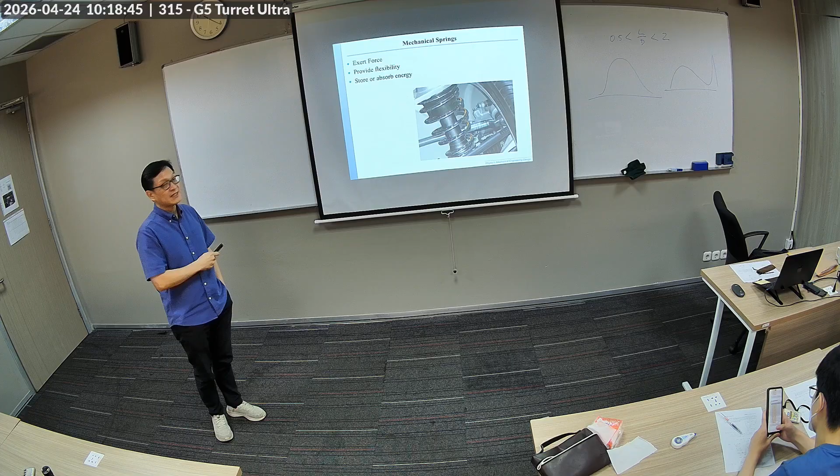You want to exert force - you want some compliance, and other times you store energy. You see it in your cars for the suspension. So you provide some flexibility, you store or absorb energy.

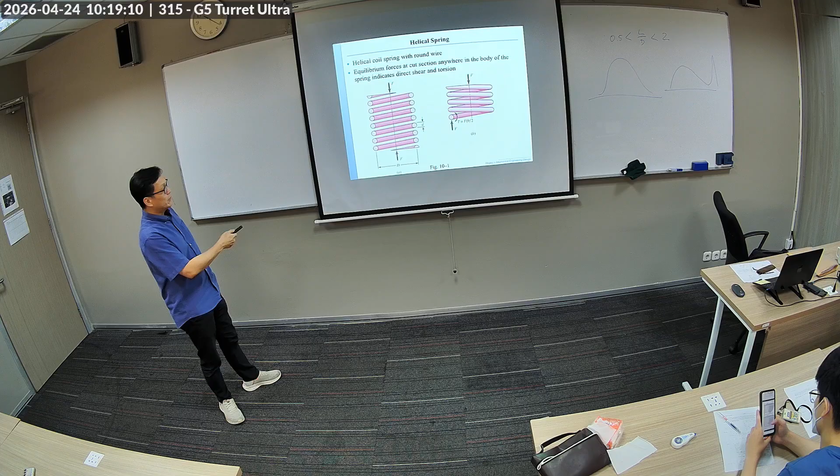If you look at a helical spring, it's basically a wire being wound. It's wound and then it creates that shape, so you have the compliance or flexibility. You press with the force, it deflects, but then it returns to its original shape.

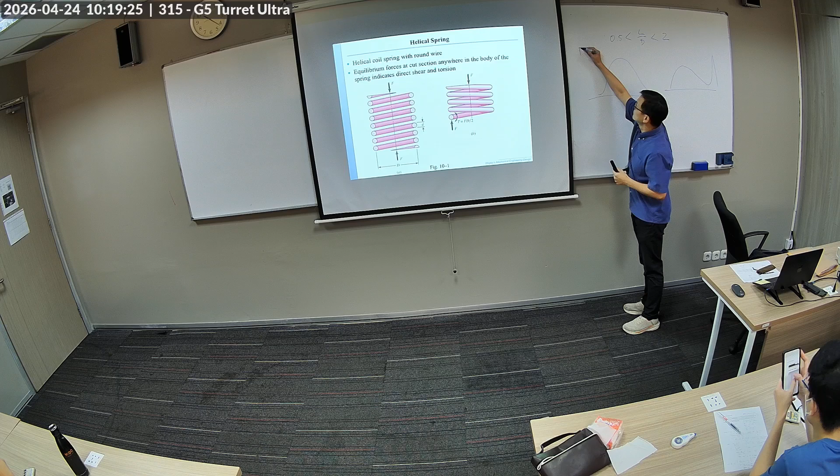The basic spring force calculation: the force of the spring is equal to K times delta x, the deflection times the K.

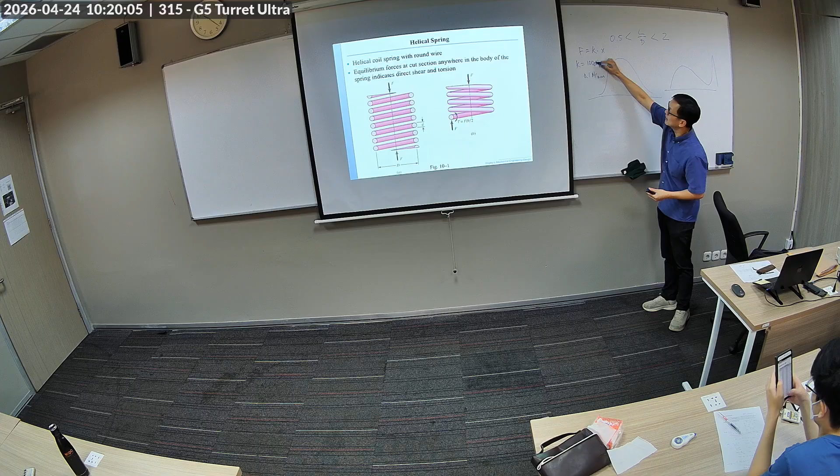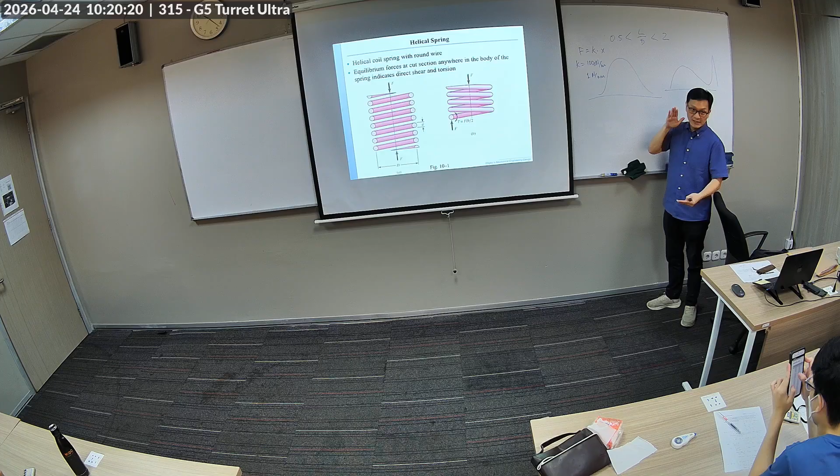If you see a K of say 100 Newton per meter, that means you need 100 Newton to deflect it 1 meter. Well, of course, you don't deflect springs 1 meter. In essence, this is like 0.1 Newton per millimeter. That's tiny, I guess. So 1,000 Newton per meter is 1 Newton per millimeter. You press 1 Newton, it goes in 1 millimeter. You press 10 Newton, it goes in 1 centimeter. So it's very straightforward, very linear, very simple.

You have different types of springs. This is the typical one you associate with springs - it's a linear compression spring. But there is also an extension spring - you pull out and it returns to the original length, which is compressed.

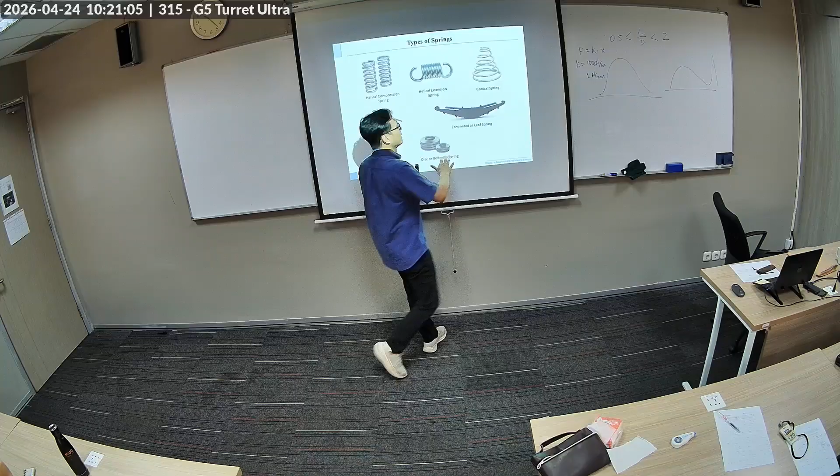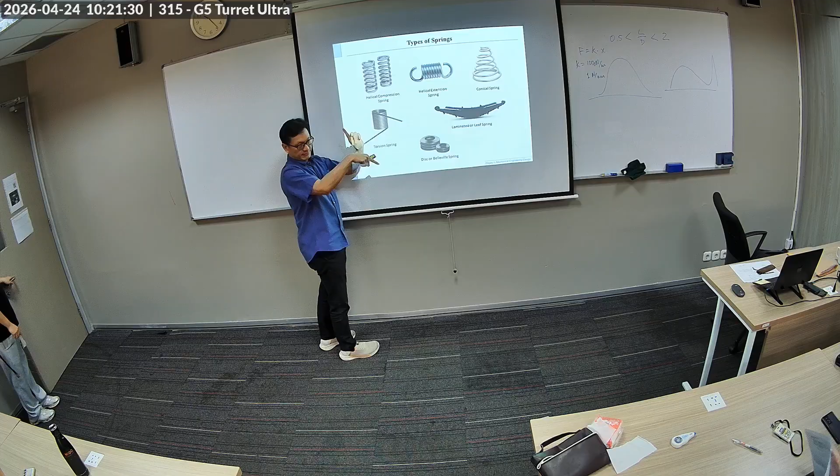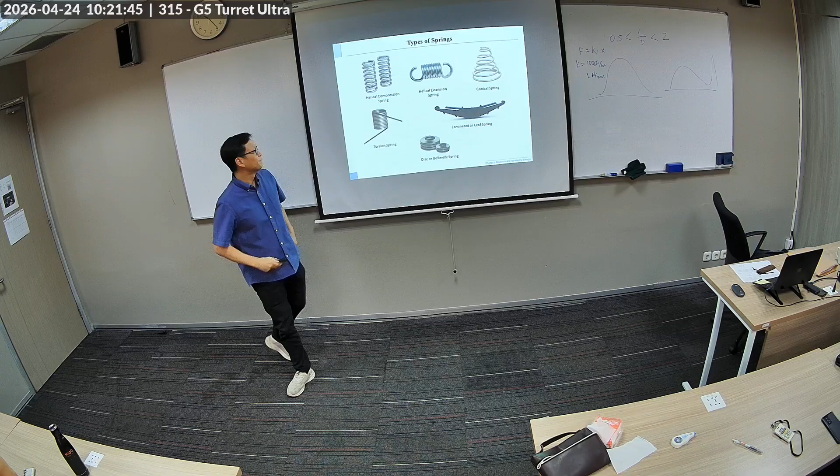Torsion spring - you basically do the angular motion, right? This is an angular spring. When you see this, you girls - your hair clips - it opens in an angular way. Okay, that's your torsional spring.

This is what you see in pickup trucks, maybe heavy load vehicles - it's a leaf spring. You hold this here, and this is where the force is. It's going to deflect this way.

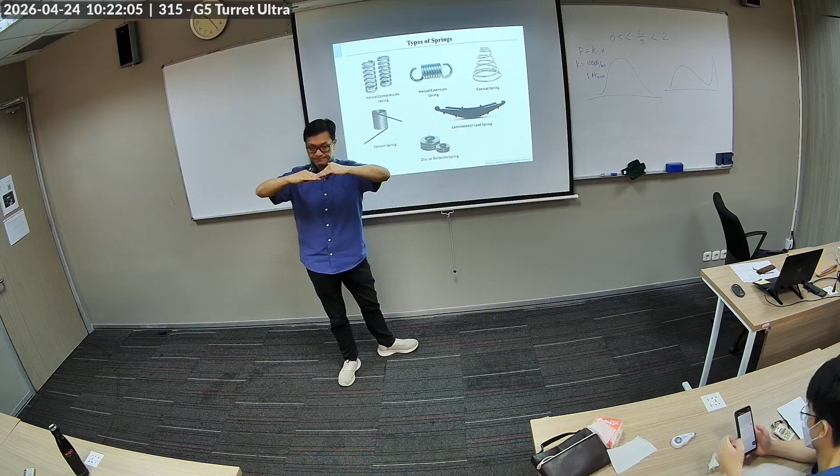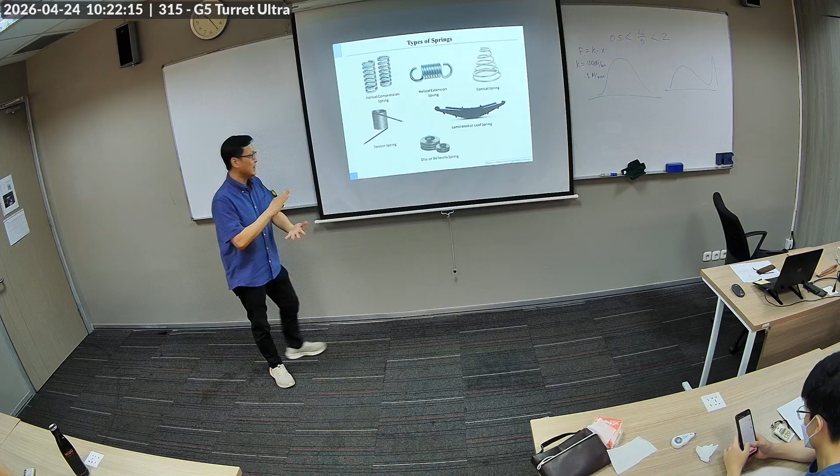This and this are Belleville springs, air cushion, or sometimes the material itself can provide this springiness. So you've got all kinds. This is a torsion spring, even though it's shaped differently - you have two coils here, but it's essentially a torsion spring.

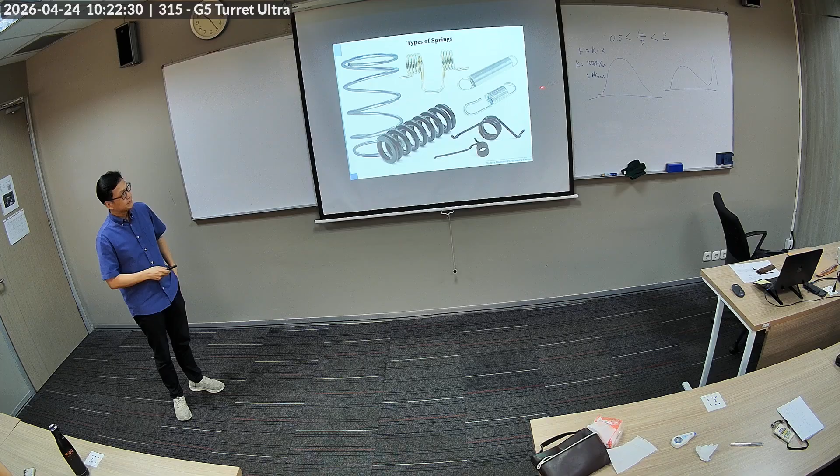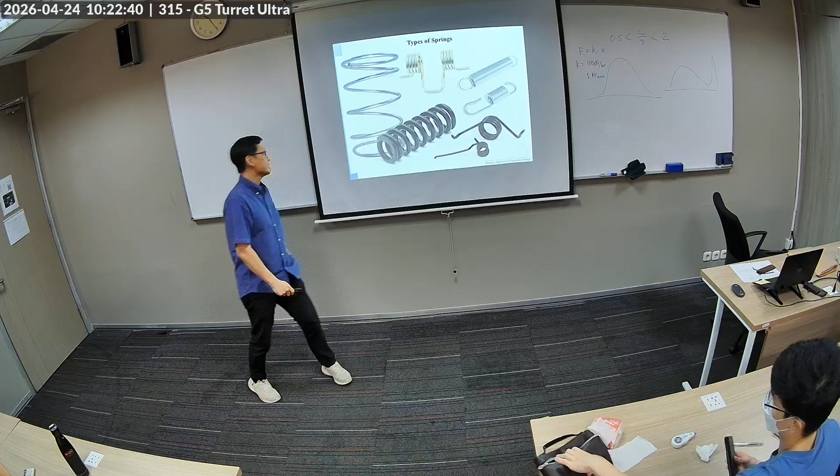Extension spring - usually you have these features to kind of put it in place. This is a constant force spiral spring, so you basically have a long angular displacement. Watches use this - you basically want a long angular displacement spring.

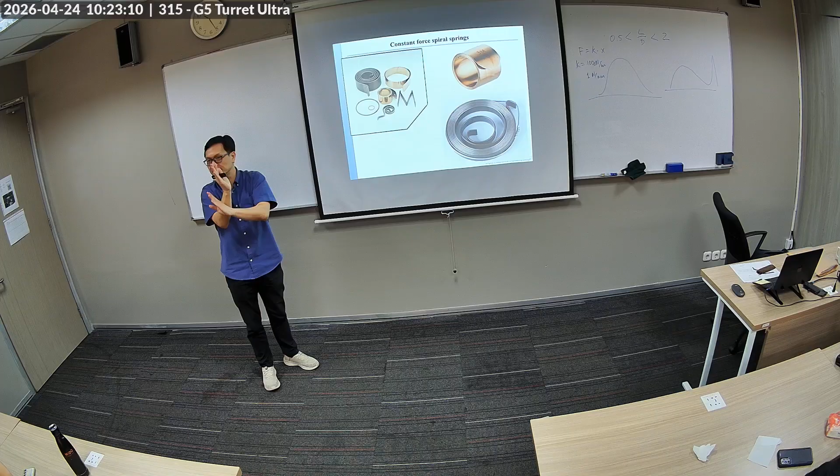Kind of a torsion spring, but a torsion spring usually only displaces like a few degrees, not a full circle. So this one you can do a full circle.

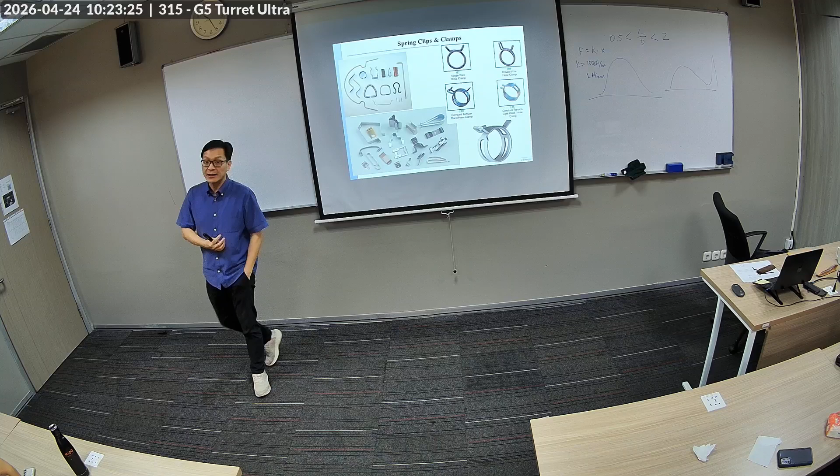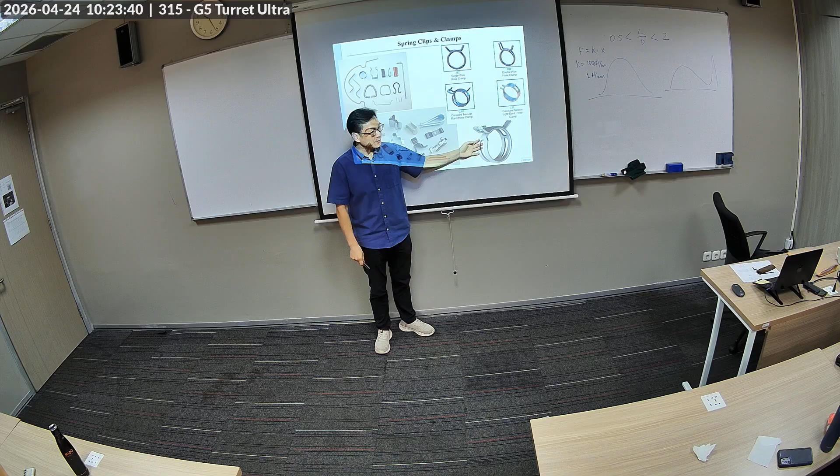These are just different clips. I know it's not a spring in essence, but they function as fasteners many times. Remember, our topic is machine design, so these are elements you see in typical machinery or linkages. You see this in hose clamps, by the way - if you ever work on cars, radiator hoses often use spring clips. You press it, get it out, and it clamps nicely.

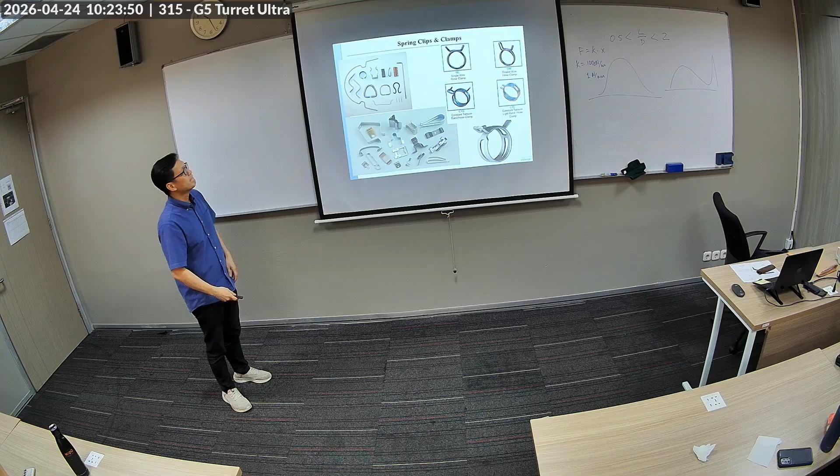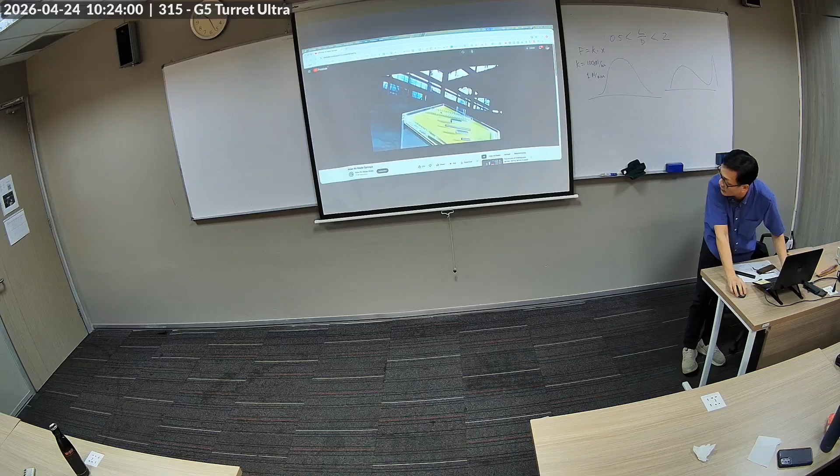So we'll get into the calculation, but before we go there, let's look at just how springs are made. This is a big one.

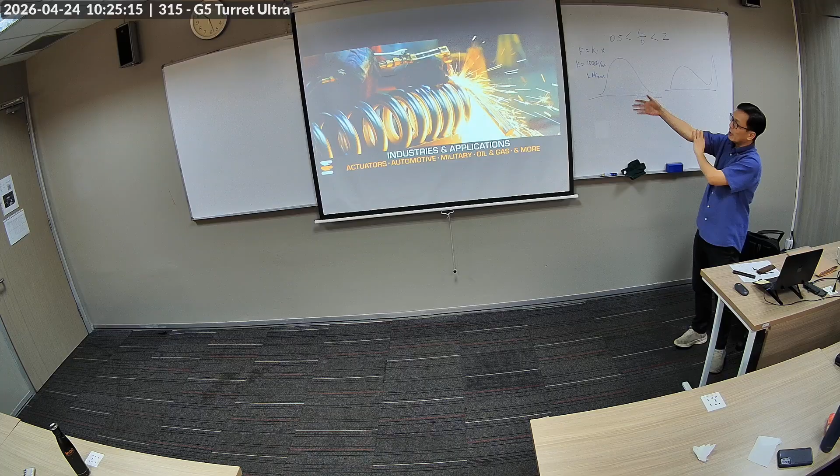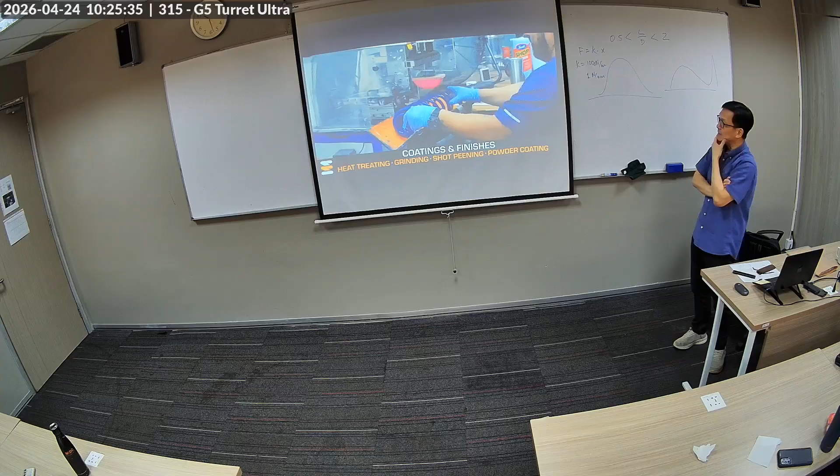That's a huge one. So you square off the ends, you cut - there are different finishes at each end. You do heat treatment to relieve the pressure, the cold work that is done. Probably automotive springs. Quality check.

Let's look at a more comprehensive video, but this is old.

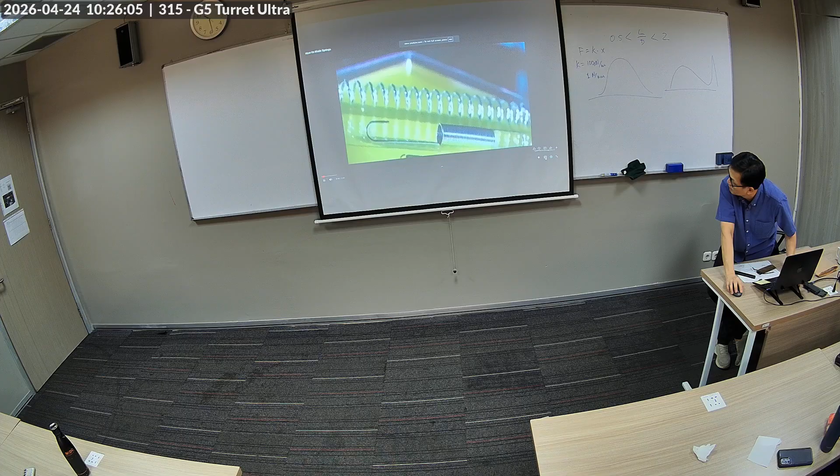Spring is a flexible metal device that returns to its original shape or position after it's stretched, squeezed, or twisted. Springs were first used in clocks during the 16th century, and starting in the late 1800s, in chair seats and bedding. Today, springs pop up all over - they're crucial components of modern technology.

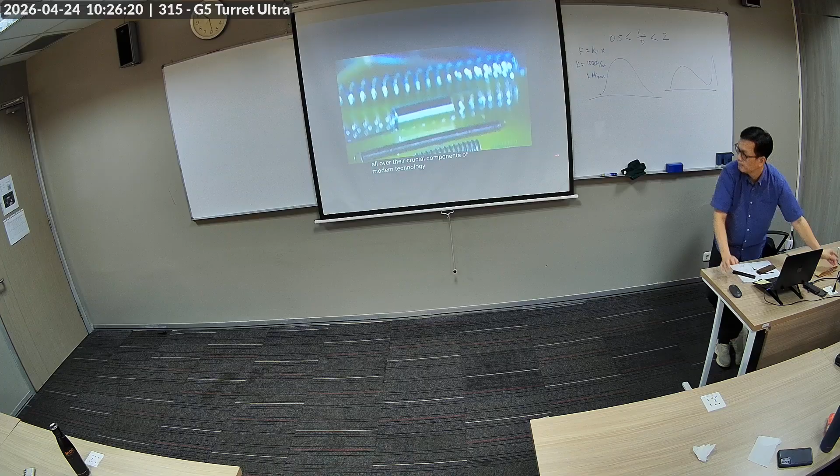Different types of springs include compression on the right and extension on the left. During use, these torsion springs will twist at one or both ends. Workers start with rolls of steel cord. The cord diameters range in size depending on the type of springs being made. A machine called a dereeler unwinds the roll, feeding it to a computer-guided forming machine. This forming machine forces the cord through a channel, shapes it into a coil, and then cuts it into segments.

Small wheels and a metal shaft guide the cord into shape. These are torsion springs for use in the automotive industry, which relies heavily on a variety of springs. The average car, for example, has about 350 of them. Looks kind of hypnotizing, isn't it?

A cone-shaped yellow sensor detects the correct angle of each spring. A good reading is required, so the machine can move the next spring forward through the channel to be formed. This machine can produce up to 2,000 springs per hour, depending on their size.

Here, another larger forming machine creates extension springs that are nearly 16 centimeters long. A mechanical arm grabs the coil and chops it into segments after it's formed in a channel. As the coil emerges, another mechanical arm steadies it to prevent it from vibrating. This keeps the spring's tension constant, enabling the machine to produce at top speed.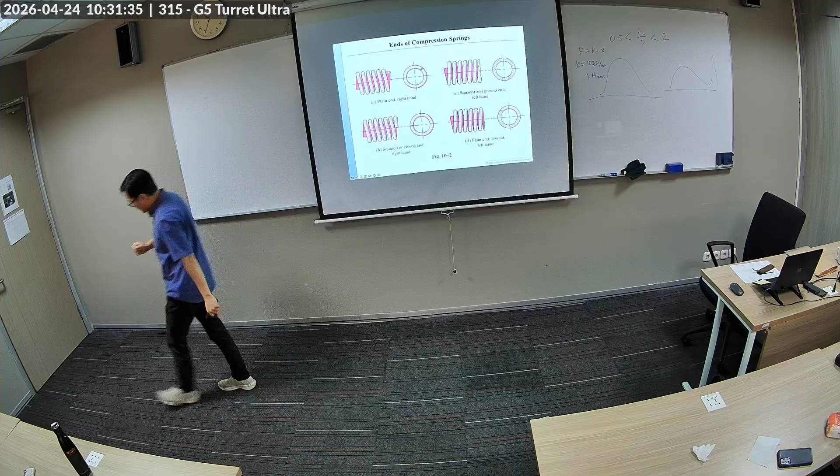Now, what we're going to calculate today is how you get the spring constants based on the spring geometry. And in order to do that, you also have to understand how the ends affect what is called the number of active coils. The fact that a spring has 10 turns does not mean that all 10 turns are actively compliant, right? Because some of these are not effective.

Now, this is the plain spring.

When you simply cut it like that, now you can finish it differently because that's not useful - I mean, at least it's not as easy to use if it's a plain end like this. So sometimes people do a squared and closed end.

Now, the way they do that, you notice that the last piece does not extend like that. But you see the gap is not constant here, right? So the gap is constant here, but here it narrows in. So you take the end and force it to be close to this one, so you have a flat here.

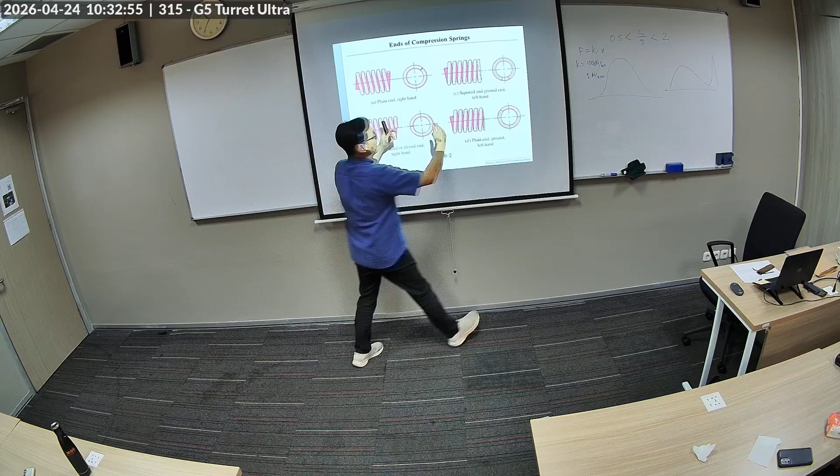So that's called a squared and closed end. This one is square, so they square it like that, and then they grind it. So you see it has a perfect flat, not just somewhat flat, but totally flat - this has a nice ground finish on it.

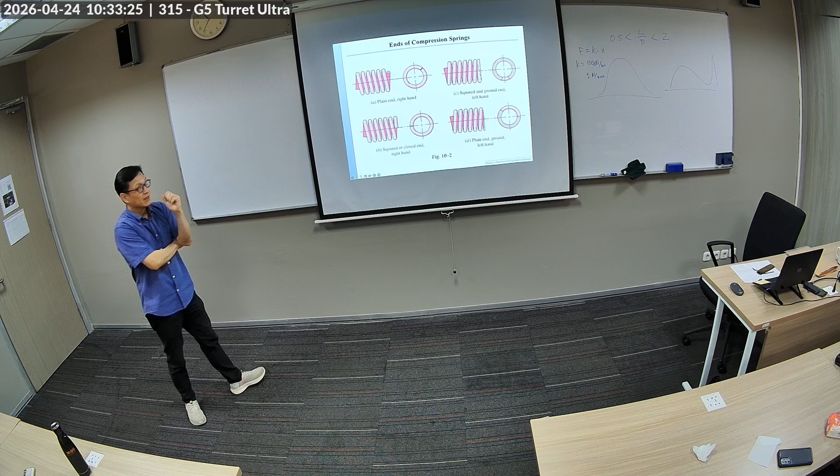This one, they simply just take this and then grind it flat, and you see these are the ground marks. So based on these finishes, you can determine the effectiveness of the coil.

Okay, so I'll spare you the stress calculation, but what you do need to understand is... who can give me a- well, that's too small to show. Okay, but anyways.

So the linear spring, the compression spring, it compresses like this, but if I open this out into a wire, what's happening is actually I'm twisting the wire. Okay, I know it's hard to imagine. Maybe I can find some animation on that later.

But so when you compress this, if I take this guy and just open it to the original wire that it was from, I'm actually twisting it. So when I compress it, what I'm doing is I'm doing this to the wire. So therefore, the calculation is a shear stress calculation, not a normal stress, because I'm not bending it.

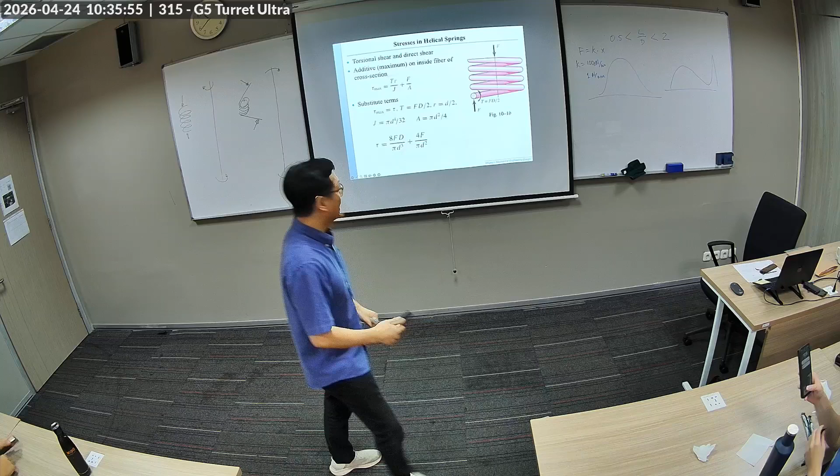I know it's the opposite, right? So if you compress a spring, you're actually twisting the wire. But when you twist a torsion spring, you're actually bending the wire - like this, this is bending, right? This is torsion, this is bending. Therefore, the calculation is a shear stress for a compression spring, but it's a normal stress, like a bending stress, for a torsion spring. So it's kind of opposite because you already form it in a different way.

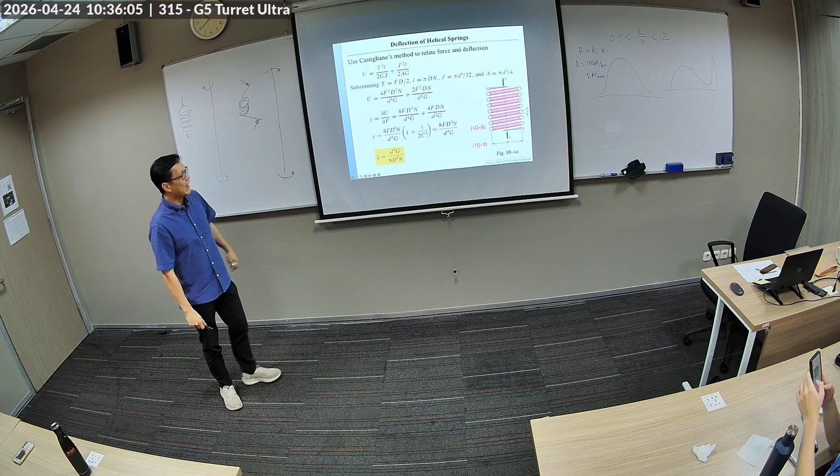Now, skipping all that, this is the K, which is the K in your physics class, F equals Kx. Where do you get the K? This is where you get the K, from the spring construction.

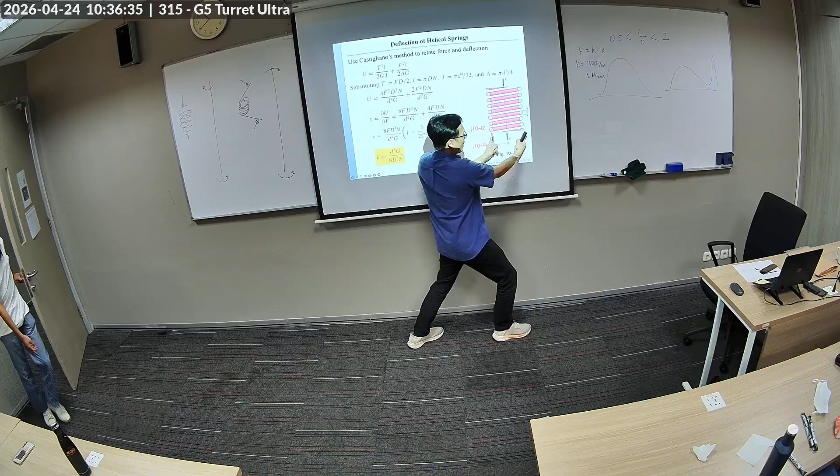Small diameter, G - G is the shear modulus. Big D is this diameter. Notice that it's not the outer diameter - it's not the outer diameter. It's the nominal diameter, which is from the middle of that. So it's the outer diameter minus the wire diameter D.

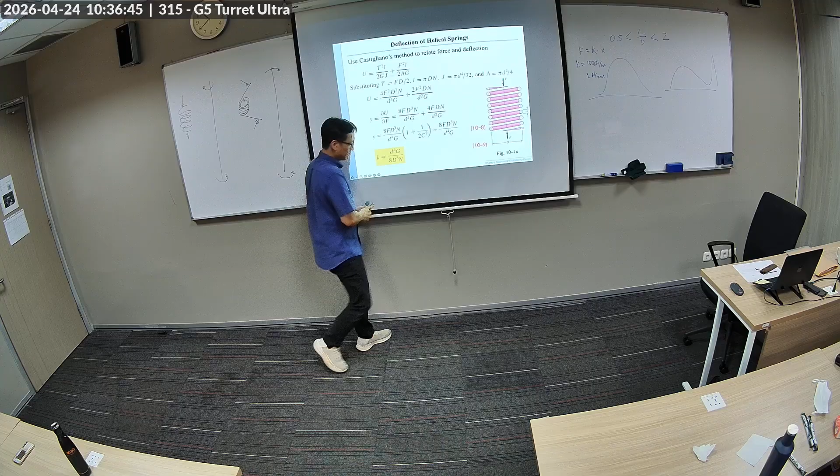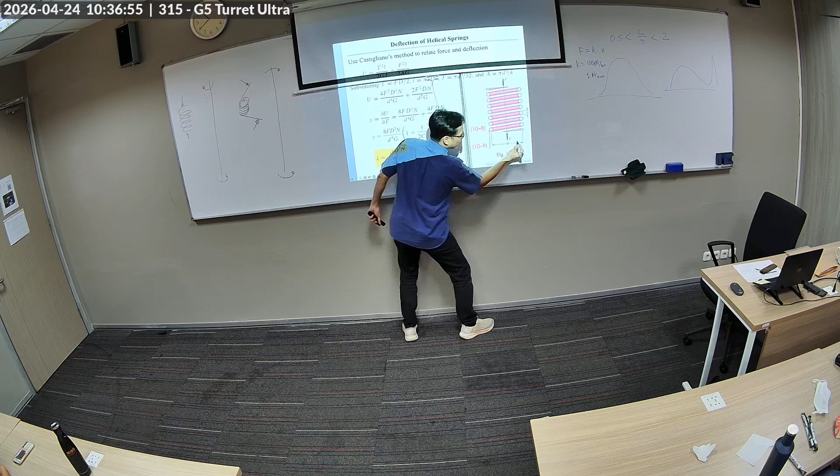So notice this is not the same as this, right? So if this is the outer diameter DO, you take DO, you minus the radius, which is half of the

wire diameter. I'm calling this a wire because it is made from a wire, basically - sometimes a very thick wire, but they call it a wire. So this is the wire diameter D, right? Therefore, DO, this D is DO minus D over 2 minus D over 2.

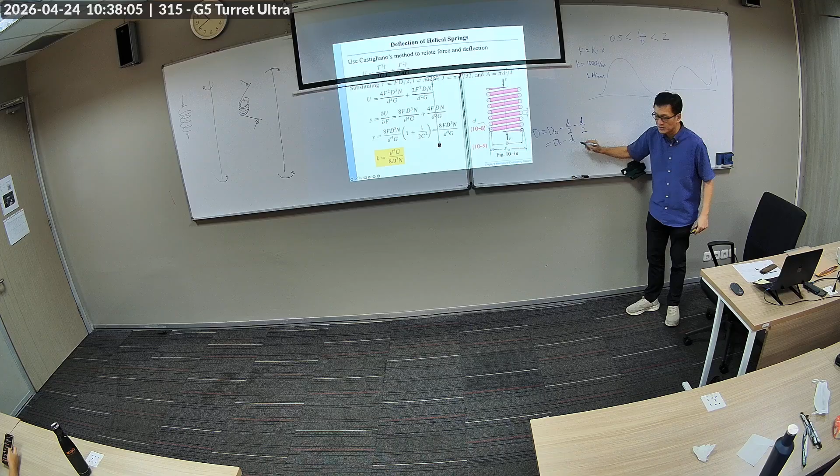Okay? Does everyone see that? Right? So if I want this capital D, which is the nominal diameter, at the center point of these wires, then it's DO minus D over 2 minus D over 2. Essentially, it's DO minus small d. Okay? That is an important feature - you're going to do this in the exercise. Any questions on that D? It's kind of small, but I hope you get that.

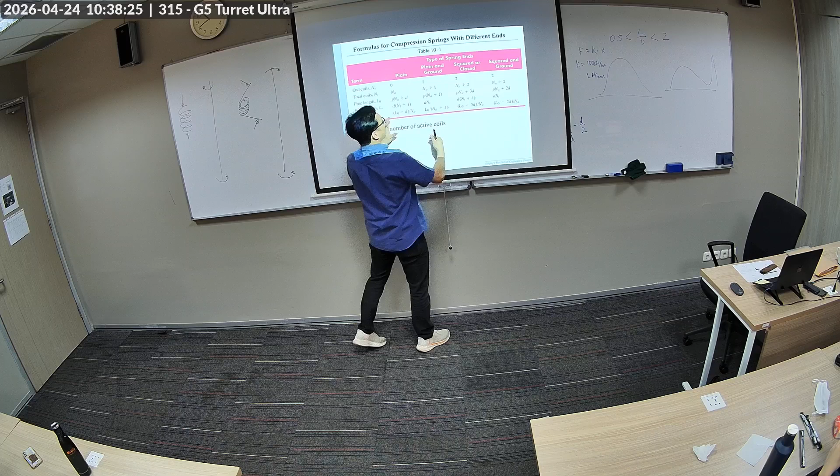These are the formulas for the different ends or the different types of spring ends. What is important - I guess the rest are not that important - but the total coil relationship with the active coil relationship is important. So if you have total coil of say 15, let's say I have 15 turns, but it's plain and ground.

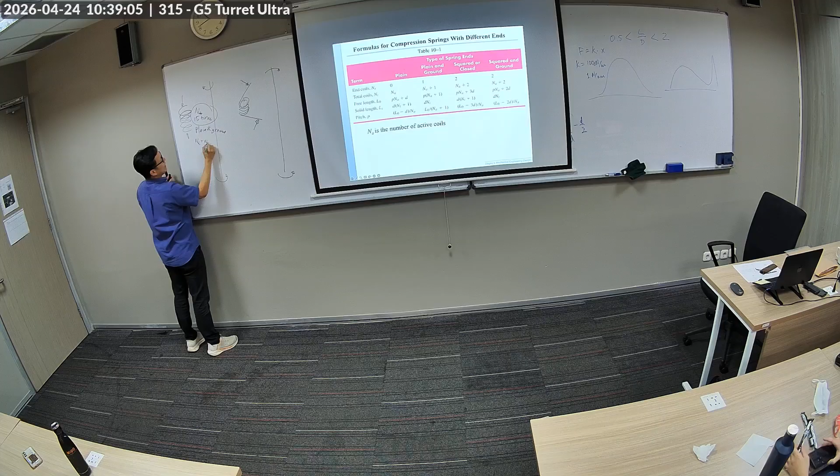So this will be your total coil. NT is 15, but NT equals NA plus 1. Or in other words, my active coil is actually minus 1, which is 14.

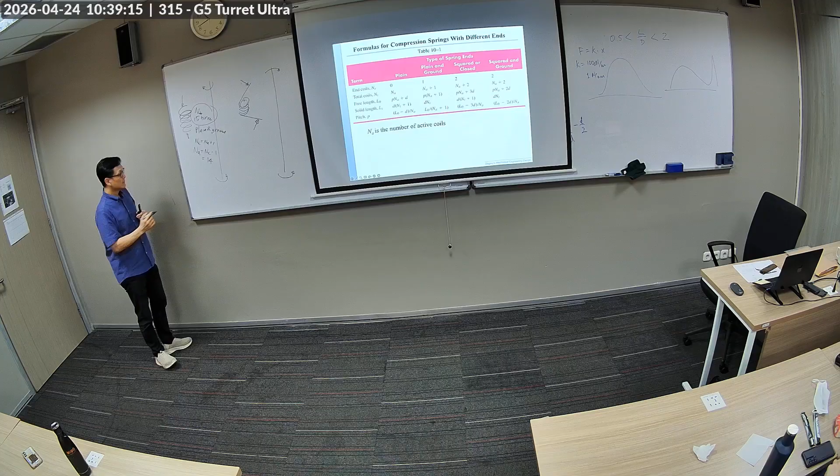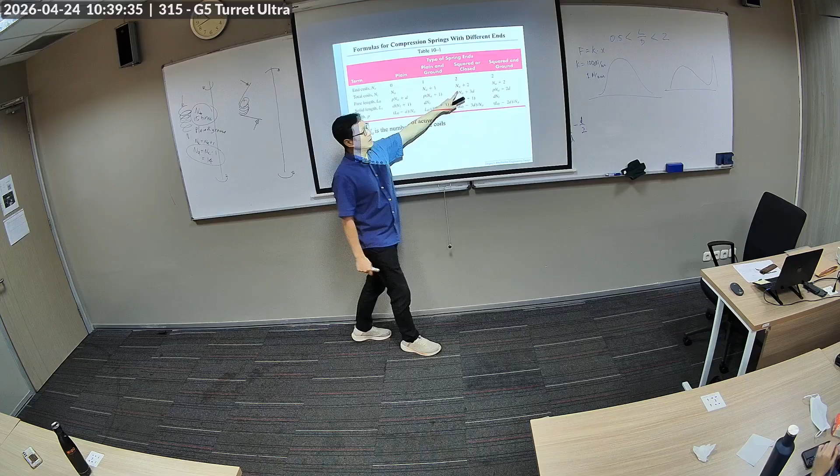So my active coil is less than the number of turns to construct the spring. If it's plain and ground, it's Na plus 1, meaning that Na is Nt minus 1, minus 2. Na is the number of active coils.

We'll do that exercise. I'm taking this from the textbook. Again, I have to compress this material, so I get rid of some shear stress calculation. We'll just go to the K calculation because I think that's what's more practical.

A helical compression spring is made out of number 16 music wire, and number 16 is basically the gauge of the wire. Wires are measured in gauges, something related to the weight per length. Not the most practical way, in my opinion, but they do it this way traditionally.

So it's a number 16 music wire, outside diameter, so DO is 11 millimeters. I think a lot of these catalogs are in inches, so we'll have to convert that. So NT is 12.5 turns. It's kind of cut off, but it's 12 and a half.

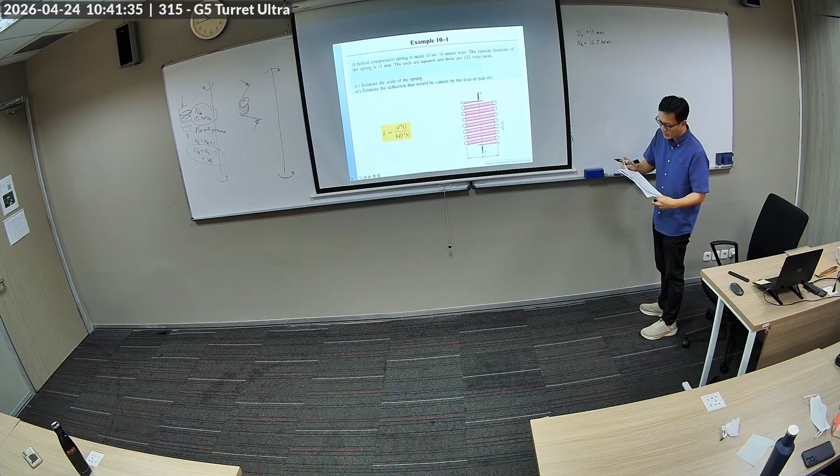Determine the scale, meaning the K, and the deflection caused by the load in part B, which was calculated before, but ignore the deflection. We'll just focus on the K.

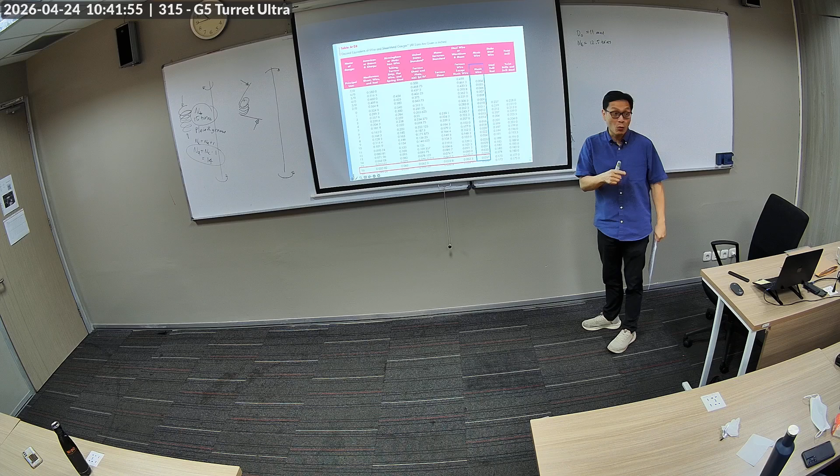From this table we can tell number 16, so this is the number of gauge. The smaller, the thicker, by the way. And if you buy a wire, electrical wires, say a 14 gauge wire, you will see - this is non-ferrous sheet and all that, they have different categories, and then you can find what the diameter is. In our case, it's a music wire.

And so number 16 is 0.037 - this is from the table - is equal to 0.037 inch.

So my K formula: D to the 4th, G, over 8D to the 3, Na. So we're going to have to calculate some quantities and look up more quantities here.

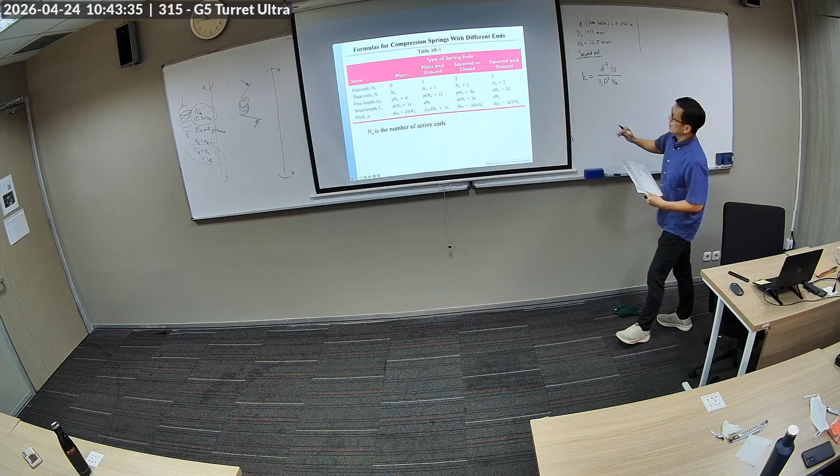The G - let's look at the active coil first. Let's see, what was the finish? Ends are square. So squared, or closed and squared and ground, is the same. So basically Na is 12.5 minus 2, so it's 10.5.

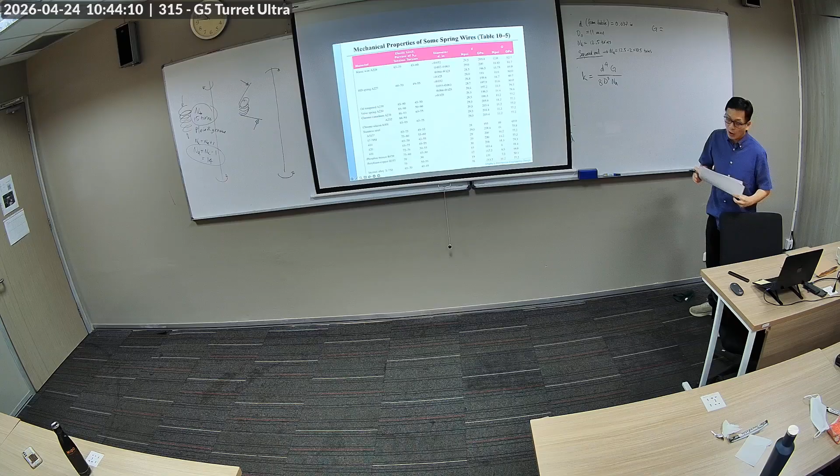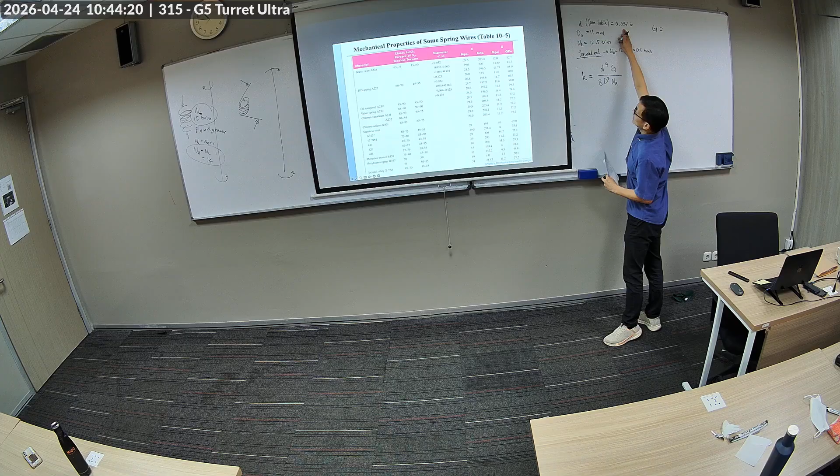And let's see, what else we need? We need G, from the material properties table - it's the shear modulus, for music wire. Now we need the diameter, which is the wire diameter, 0.037. So we are here, between 0.033 to 0.063. For music wire, the G is 81.7 GPa, gigapascals. This is from the table.

Any questions? Then it's just math. So we have to convert - oh wait, we need this D. D is equal to D0 minus D over 2, minus D over 2. So 11 millimeters, convert that - divide by 25.4 - gives 0.433.

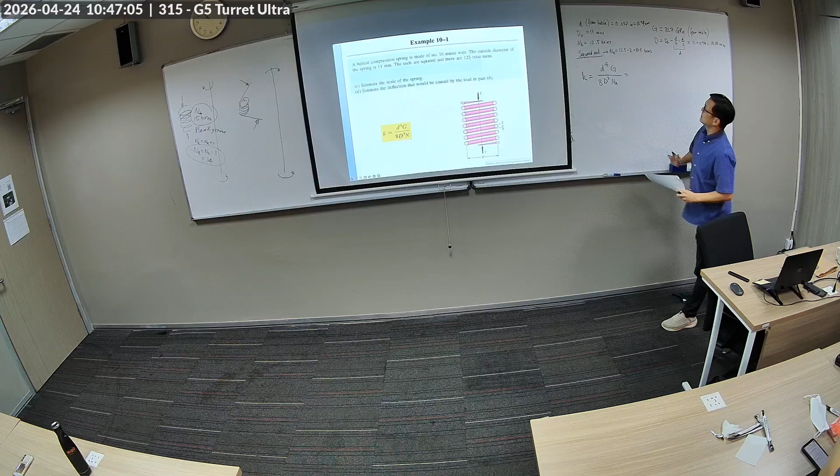Okay, now everything is metric, right? GPa is SI, and now we are consistent. Good catch.

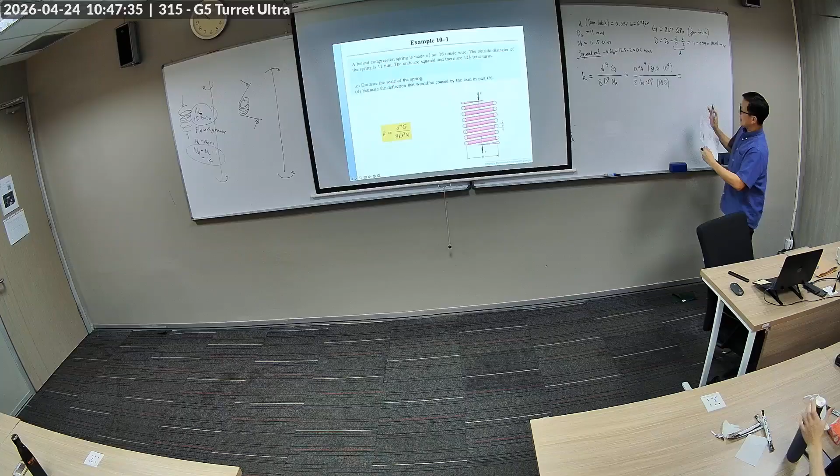0.94 to the fourth, 81.7 times 10 to the 9, over 8 times 10.06 times 10.5. Now, after some conversion, you'll end up with 0.9 Newton per millimeter.

This will get you to Newton per meter, so this should be like 900 Newton per meter. And so it's 0.9 Newton per millimeter - Newton per millimeter is a more common unit.

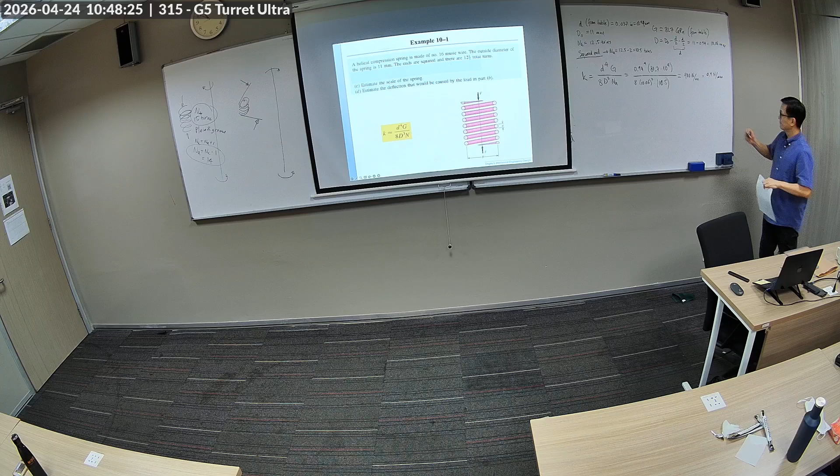Any questions? One inch is 25.4 millimeters, just in case any of you are still wondering.

All right, if there's no question, let's do another one on torsional spring. This is a torsion spring.

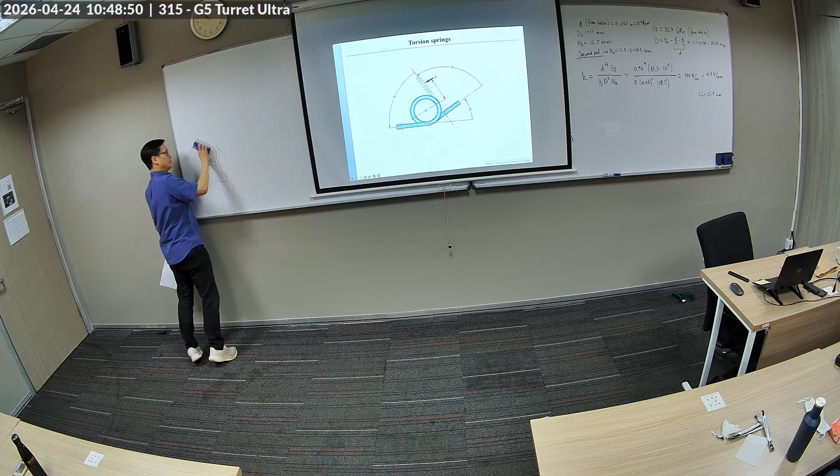It's a different formula, obviously. The number of active coils is related to this length of the arm also. And then the spring rate formula is like that.

So let's go ahead and do this one. A stock spring displayed here is made from 1.8 millimeter diameter music wire, so small d is the wire diameter. It has 4.25, so this is the body, and B is the body term, because you have the arms, you have the legs, and then you have the body.

So NB is 4.25 turns with straight torsion ends. It works over a pin of 10 millimeter diameter. The coil outside diameter is the one we need, so the DO is 15 millimeters.

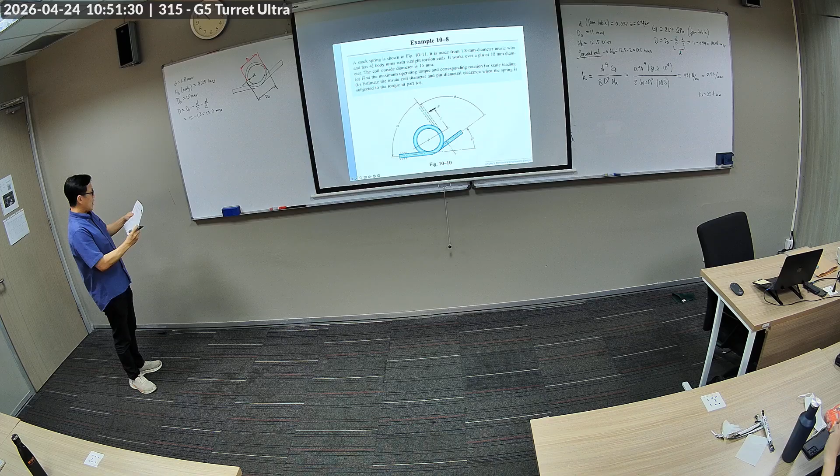So this is 15 minus 1.8, which is 13.2 millimeters. We can look up... we also need the G later on. Do I have that table? The E, we need the E. So this is from the table.

We are at 1.8 millimeters. What is that in inches? Now we go back and forth because this is in inches. 1.8 divided by 25.4 is 0.071 inches. So we fall into this diameter range. Then E is 196.5 megapascal.

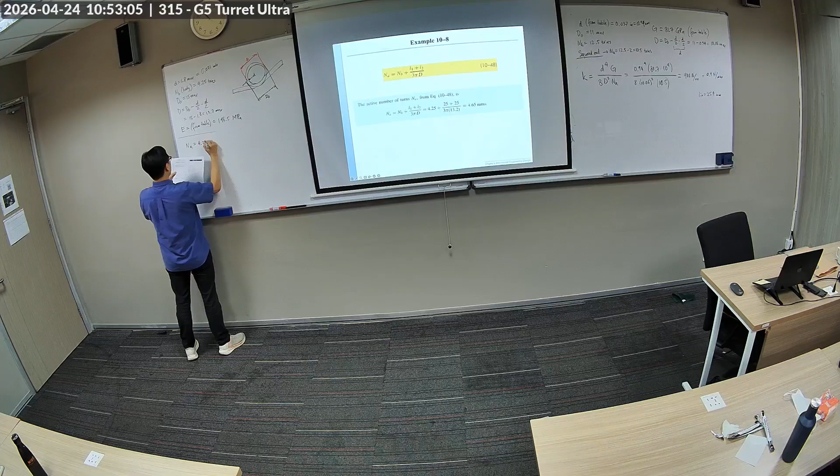Now, active turns - we need to first calculate the active turns. NA is equal to NB. I'll just write the numbers here. Nevertheless, I'll just write it: 4.25 plus, these are the lengths.

What's it given? It's not given. L1 and L2 are these lengths.

For the E, is it GPa or MPa? It's the units you mean? Yeah. Of course, correct. Thank you.

Where do they give the L? That's kind of magically appear. We assume. No.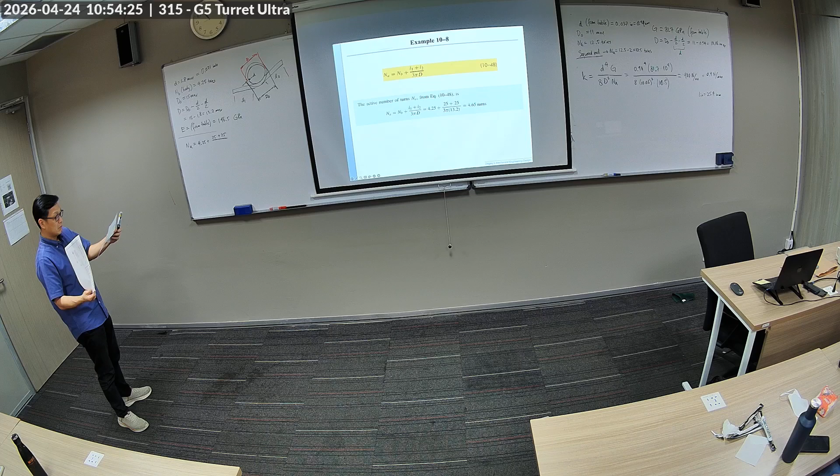Okay, so this is 3 pi d, which is the nominal diameter. So equivalent active is 4.65 turns. That's the active coil.

Now we're calculating the K, and the K is D to the 4th, E... so this is L1 and L2. I'm just going to put a question mark there because it's not well defined. So 10.8 D Na.

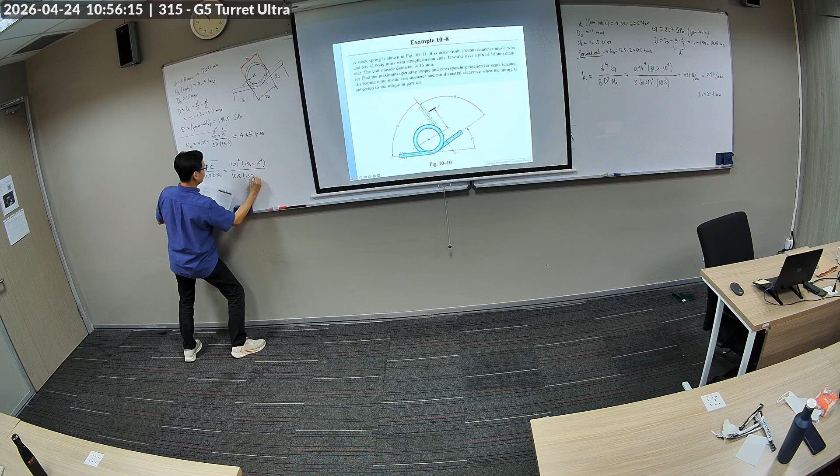Okay, now this is just math. Watch the units because we're doing all this in millimeters. Even though we did that conversion, that's only for looking up the table purposes. D is 13.2, times the active coil calculation.

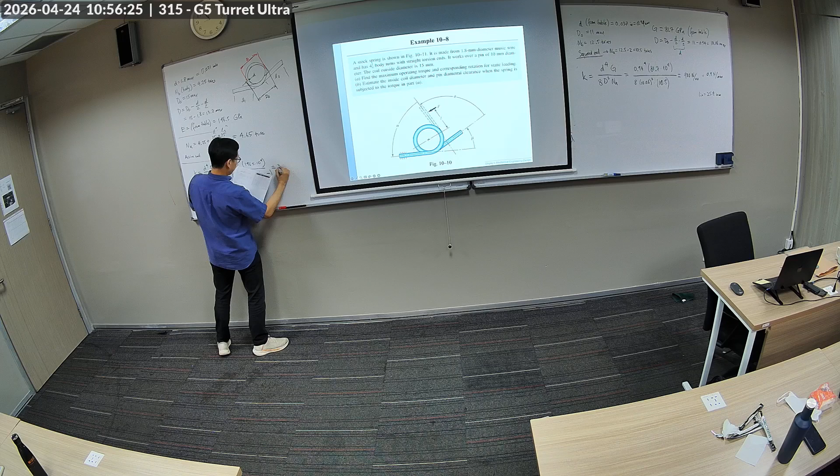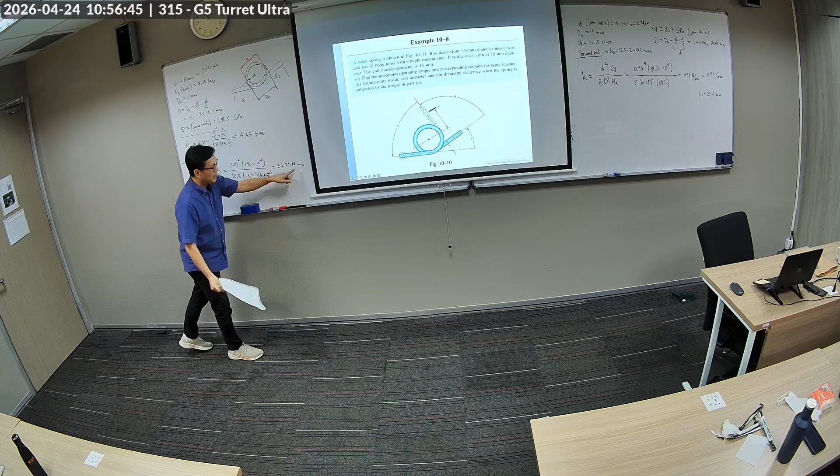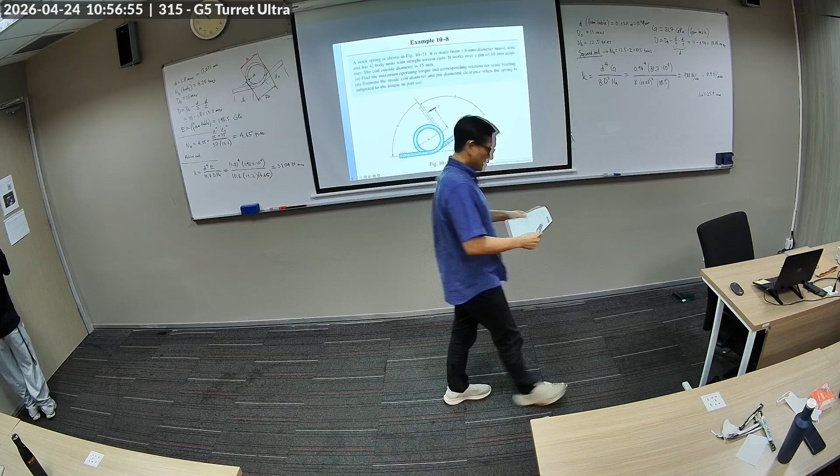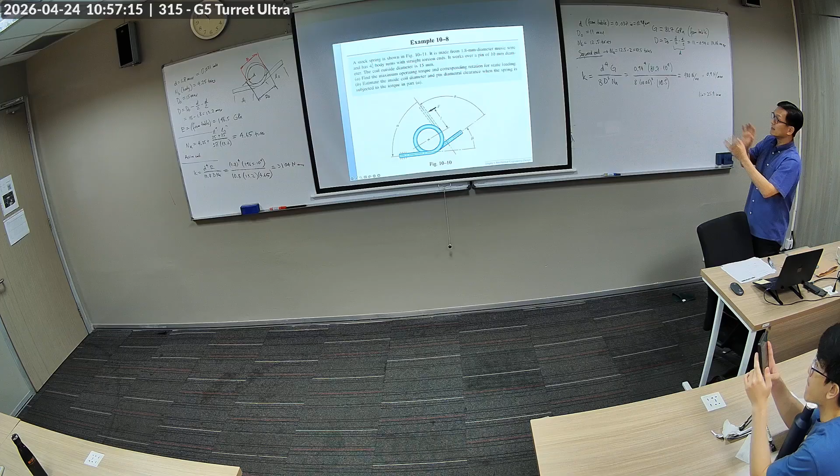This is a torsional spring, so the unit is not Newton per millimeter, it's Newton millimeter because you multiply with torsion. Any questions? So you got torque equals K times theta, right? So this is the calculation for the spring rate in relation to the spring geometry.

That's going to be all that we're doing for springs. All right, that should be good for the day. We don't have time for motor sizing - we'll do motor sizing next week.

Yes, next week is it? We'll have one. Will the makeup be in next week? Is next week the final week? No, I mean the 14th week. No, next week is week 13. Okay, 13. Yeah, I'll find the time. So we have motor sizing, and then I'll spend one week just doing a review of the quiz materials before the final exam. We'll spare one week for that. So we only have week 13 and 14 left, right? Yes, week 13 we'll do motor sizing, and week 14, let's do a quick quiz on springs and motor sizing, and then we'll do a review for the finals.